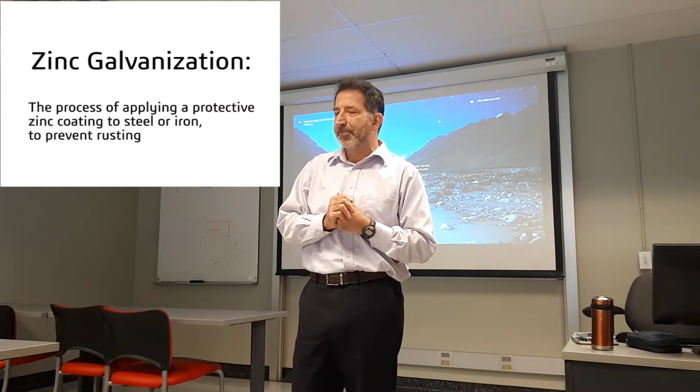That job at Galvano happened to be a job where I was working for a division that was doing the coatings. They applied zinc plating, galvanizing, or different types of coatings on the bolts that another factory in Fasco used to make. I spent 7 years there, and I was so lucky because it was a small company, a small plant. There were only like 45 employees. We worked 3 shifts, and I was young, and I could do whatever I wanted because it was small.

So there were no boundaries. I could learn about everything. I wanted to learn how every pipe, every valve, every system, every controller, how everything worked and what it did in the plant. I spent time doing that, just asking questions, learning, helping. Whenever somebody came to me with a problem, I didn't have all the answers, but I would figure it out and help them, and go back and say, yeah, this is how we can make your job better, or your job easier, or your line more productive.

And that was my main objective throughout. I learned that's what I need to do because my boss at the time said, you need to learn the process, you need to learn what we're doing here, you need to learn everything that you can. And that's true whether it's in this plant or that job or whatever the job is. So take the time to learn.

So 7 years there, and then I was doing well, loving it, wonderful. I even had an opportunity to become the plant manager over there, and I was still a little bit on the young age. So Mr. Bahadrian said, better thing is for you to come to the mothership, to Fasco, which is the big plant where they make the fasteners. Now this is a huge factory, spend some time over there and learn how we make the bolts.

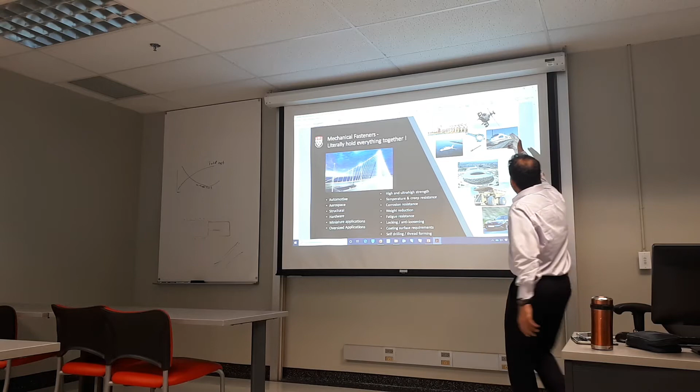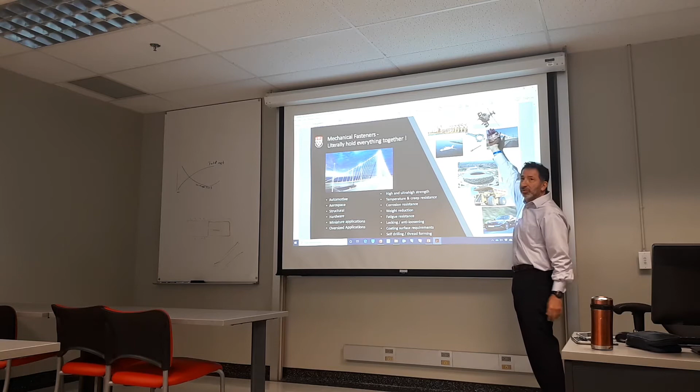Aircraft, different aircraft - you can imagine whether it's a civilian airplane, a military airplane, or a helicopter, there are critical fasteners holding all of this together. Bolts, nuts, screws, rivets, holding it all together. And if one of them fails in a critical position, it's going to cause a catastrophe.

Cars, trains, stadiums, large equipment - fasteners are everywhere. I told Jenny before starting my talk here, if I just took you guys outside and you looked around a little bit, you'd be amazed at where fasteners are being used. Look around you, this building has a steel frame, and the steel frame is held together with bolts. The chairs you're sitting on, the tables you're using, everything is held together with screws and fasteners.

So what I'm trying to say is, the reason why I'm still learning to this day is because fasteners are as complicated or as simple as the joint or the application where they're being used. And I'm always learning about a new application.

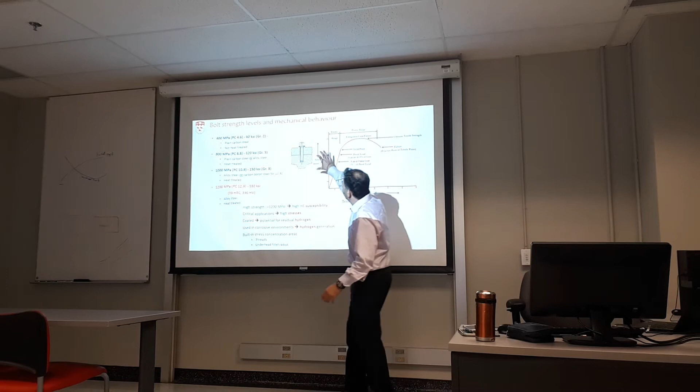Fasteners are sophisticated components because they're designed to clamp a bolted joint together. And how they work depends on the strength level of the fastener.

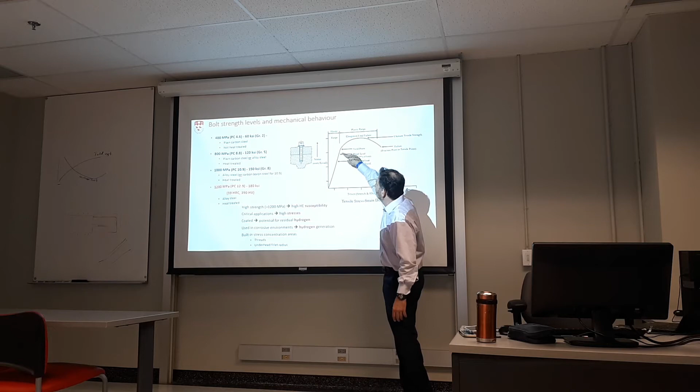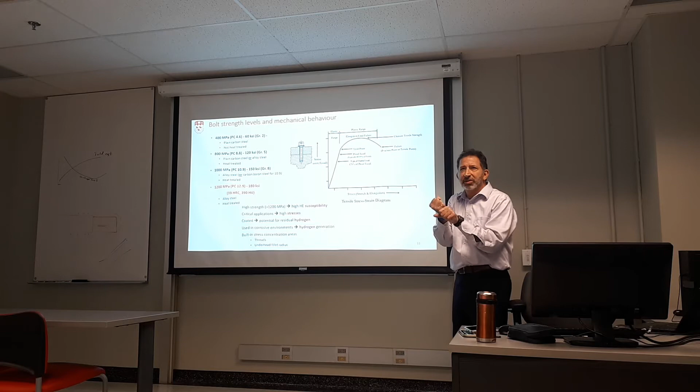There are different categories of strength levels, different sizes and shapes. But basically the fastener, as it's being tensioned in a joint, stretches, and as it stretches, it creates a clamp load. The clamp load is designed to overcome the separation forces. So if you have a joint that wants to open up, the fastener has to be strong enough to overcome that. That's the whole key to designing a joint.

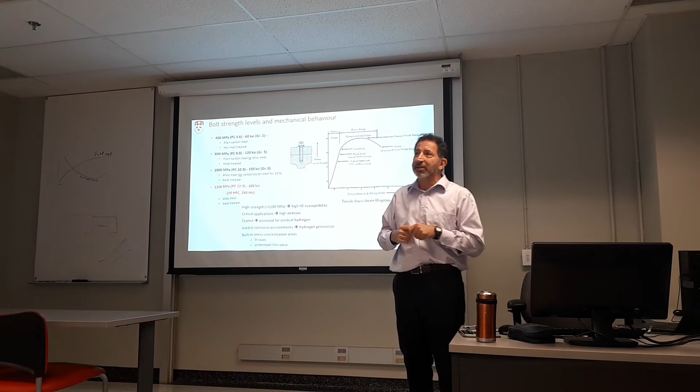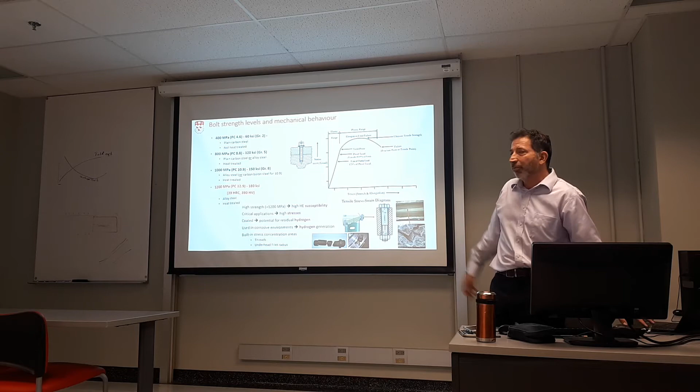And it's never one bolt and one joint, it's a whole array of bolts in a very sophisticated joint. So a lot of things can go wrong, and when they do, fasteners will break, and when they break, that often causes a catastrophic accident.

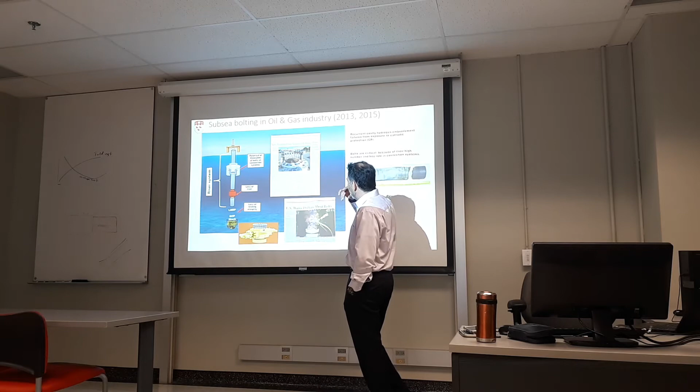Here's one example of what I've been involved in. I've been involved in bolts that are breaking on offshore oil platforms in the Gulf of Mexico. You saw it made the headlines in the Washington newspapers and the Wall Street Journal too. This happened 2 years after the BP oil disaster, and you can imagine people were really concerned because these are anywhere from 1 inch to 3 inch diameter bolts, high strength bolts that were breaking in subsea applications on a component called the blowout preventer.

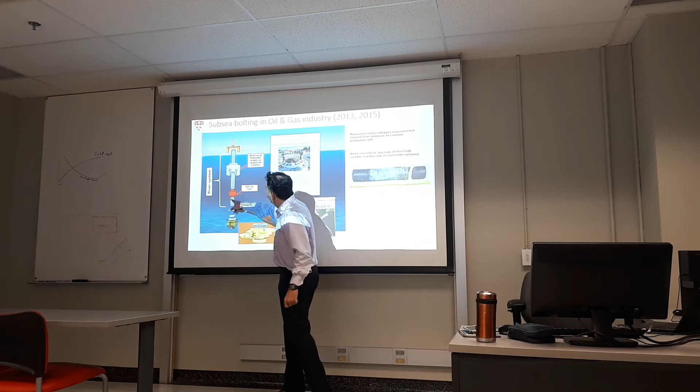This blowout preventer is supposed to prevent the oil well from overflowing if something happens or goes wrong. It just shuts the oil well. But these bolts were used in that blowout preventer, and they were breaking.

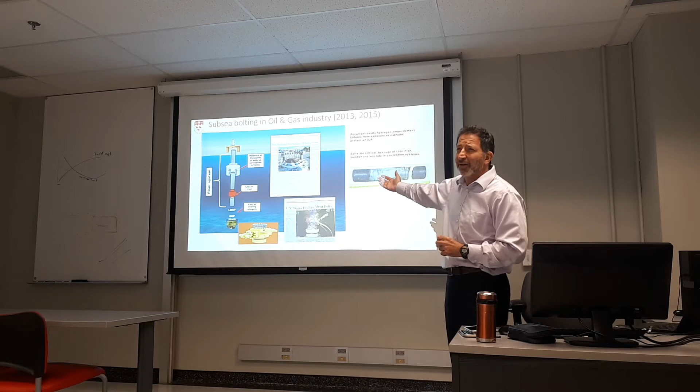It caused a lot of concerns because they were breaking on oil platforms all over the Gulf of Mexico. All these operators of offshore oil platforms around the world got seriously concerned, and they started panicking and changing things all over the place. That's one example of what I've been involved in. You wouldn't think fasteners - let's talk about another one.

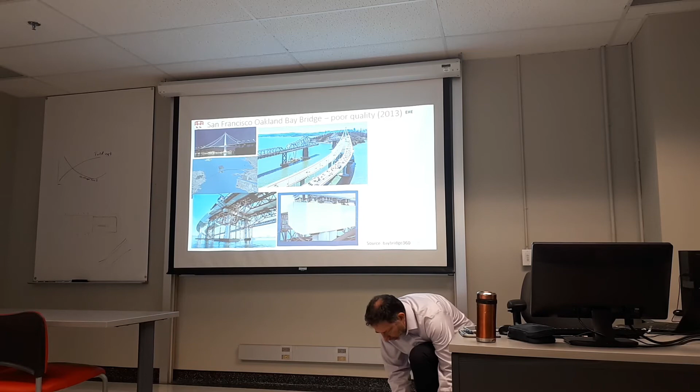This one was the Bay Bridge in San Francisco. This bridge was built to replace an older bridge that partially collapsed during an earthquake in 1989. That's the old bridge. In 1989, it collapsed in the Loma Prieta earthquake, and it caused some people to lose their lives. So the city of San Francisco, the city of Oakland, and the state of California decided they needed to build a new bridge - there was no way to reinforce the old one, so they built this new bridge.

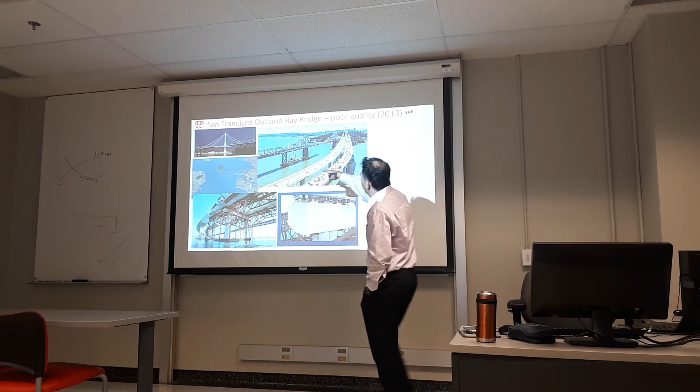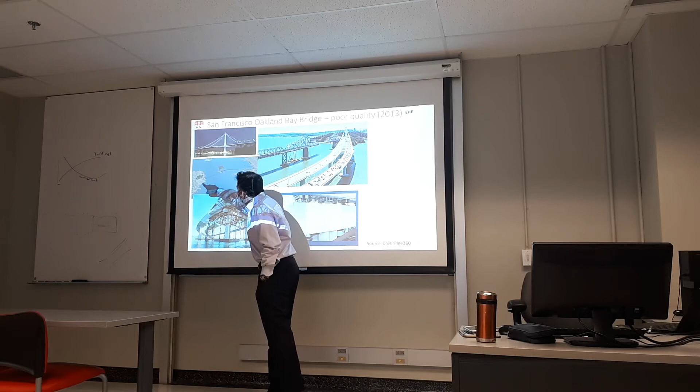It was a 7-year project. It's the span over here - it connects Yerba Buena Island to Oakland. You have another bridge that goes from there to the island itself.

I got involved because I was working with the constructor, the contractor who was building the bridge, and helping them design a new bolted joint. The research we were doing here at McGill was helping them make some choices, and they needed my help to figure out how to install bolts with a specific type of coating. So I was involved with the bridge for a few years.

Then when I thought my job was done and I was happily moving on, knowing the bridge was a few months away from opening, they gave me a call and said, hey, can you get over here yesterday, because we're having problems with the anchor rods breaking all of a sudden as they were being tensioned. They were being tensioned when the bridge was being anchored into place, and within a few days these anchor rods were breaking. It caused a major panic with the community over there.

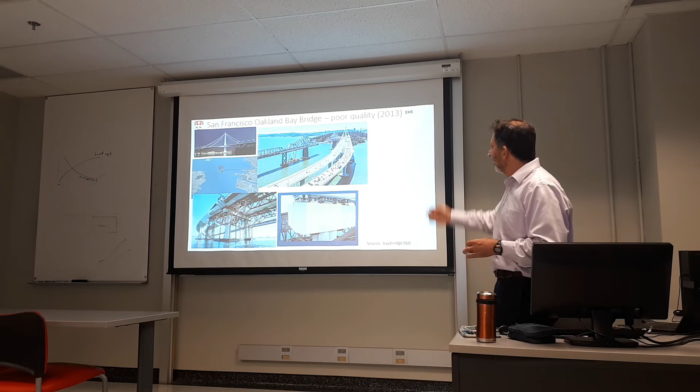It was in all the newspapers. We were getting phone calls - reporters were calling me and hounding me to try to see what was going on. I was involved, and I led the failure investigation on that project. That took 2 or 3 years to kind of close out, but it was a very high-profile failure case that I was involved in. Another example.

I talked about the Freedom Tower in New York. That's another one I was involved in where bolts were breaking.

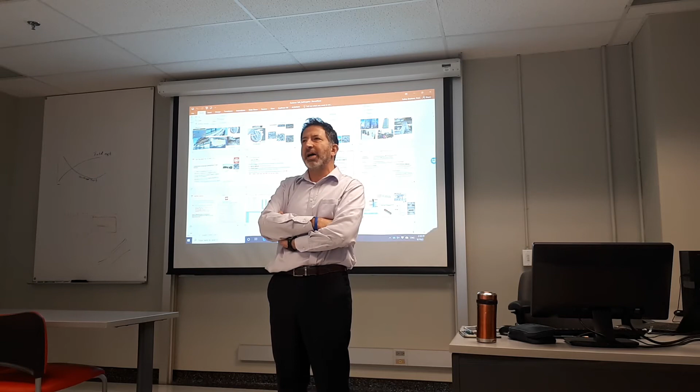I've been involved with projects that aren't as high profile, but with auto companies like GM and Ford, designing new materials for fasteners used in high strength joints. We're trying to reduce weight in cars, which means finding materials that perform at higher strength, so we can use smaller, higher strength fasteners to redesign joints. We've done a lot of work here at McGill to help these companies develop these materials.

One of our biggest sponsors for our research programs here is Boeing. They've funded a lot of the work we've done with our students, all focused on the fastener aspect, and that work is even translating to their landing gear. That opened doors for me to work with Messier-Dowty and Héroux-Devtek, who build landing gears for aircraft.

The opportunities with fasteners are wide and broad, so there's no limit to it. It all depends on whether you really want to go into an industry that's manufacturing or not.

The specific opportunities with the fastener industry, and the manufacturing base in North America altogether, with guys your age, there's a tendency to focus on what's quote-unquote sexy, and manufacturing is not. It's a basic, fundamental need. A lot of our manufacturing base is shifting to the Far East, principally China, but that means North American manufacturers, to compete, have to make higher-end, more value-added products and develop more expertise. There's a need for not just engineers, but anybody to go work in a plant.

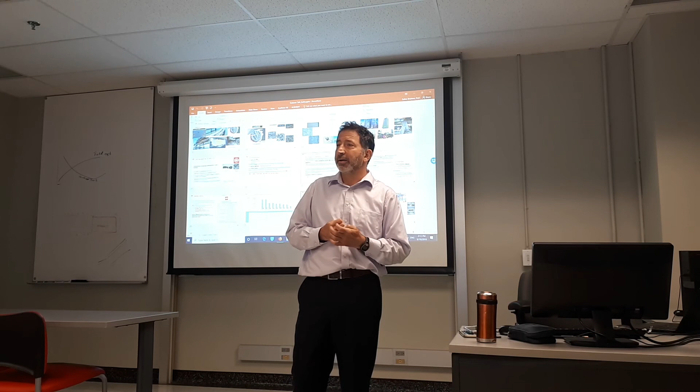Yeah, I'd guess too that with a lot of the workforce retiring out, there's a lot of room for rapid promotion. Absolutely. Provided you roll up your sleeves and work, you're going to succeed in any industry you get into. But to Jenny's point...

There's a hollowing out of knowledge. A lot of people with years of experience are retiring, so now these companies are left with few people who know what they're doing, and they can't necessarily attract all the right types of people. So there's a lot of opportunity to grow quickly and move up, provided you're ready to work and learn.

Infasco is a manufacturer of fasteners, one of the largest in the world. They make standard fasteners, not specialty products, so it's high volume, which from a metallurgical and material science perspective is very interesting. Their products go into every big structure around the world - they literally get used everywhere. You know their product because it has a triangle on the head. All fasteners are manufactured with the manufacturer's ID, and they all have their own registered trademark IDs.

Infasco's is the triangle. There are three companies in North America that compete in that market, and Infasco is one of them. Their products go everywhere - into heavy equipment and machinery, bridges, structural business. They sell product to Harley, John Deere, Caterpillar, and so on. There's a lot that they do, but really it's a factory making fasteners at high volume, which means from the metallurgical perspective there's a lot to learn.